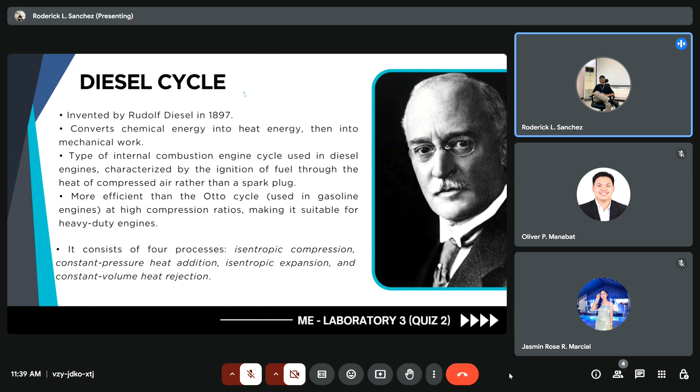However, sa diesel, medyo iba siya. Sa diesel kasi, wala tayong spark plug but rather enough na ang ating high pressure compression to combust a fuel mixture. So, ang diesel cycle daw ay more efficient than the Otto cycle at high compression ratios, making it suitable for heavy-duty engines. It consists of 4 processes: isentropic compression, constant pressure heat addition or isobaric, isentropic expansion, and constant volume heat rejection or isometric.

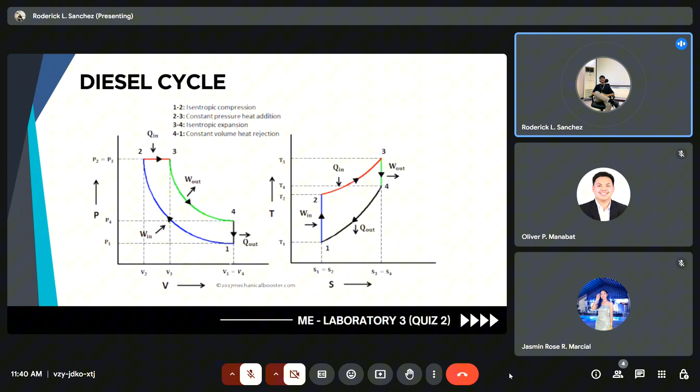So, in this slide, makikita natin ang PV at TS diagram ng ating diesel cycle. Pero, in order to better understand this topic, hihimay-himayin natin siya into some parts. A brief overview on the kinematics and mechanism of diesel engine.

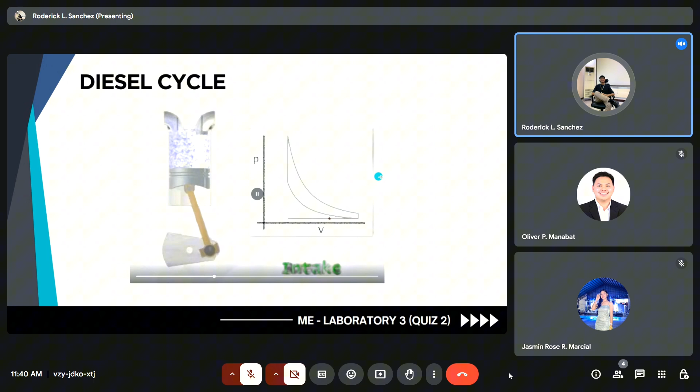As we can see here, meron tayong air intake, compress, power stroke, and the exhaust. So, ito ang magiging piston rod natin at ito ang ating cylinder sa diesel cycle.

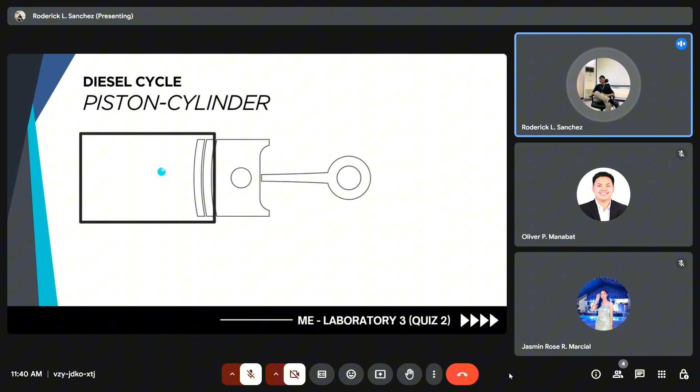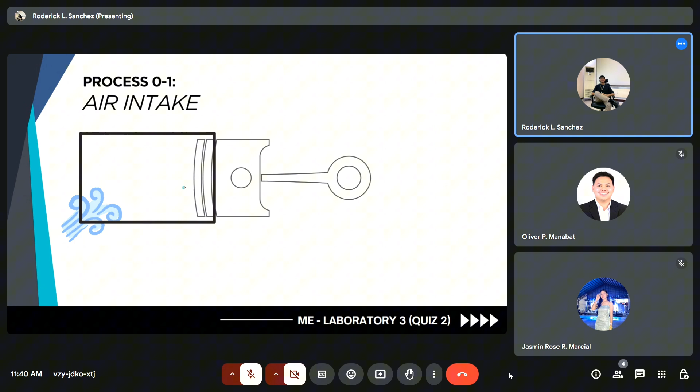Ngayon, process 0 to 1, syempre, hihigop muna tayo, ang ating engine ay hihigop muna ng air. As I said, kailangan ng air and fuel in order to have combustion.

So, after the air intake, magkakaroon na tayo ng isentropic compression. The piston moves from bottom dead center to top dead center. Ang bottom dead center natin is ang location ng ating piston ay nasa pinakababa papunta sa pinakataas. Only air is compressed in this stage, unlike the Otto cycle, where air-fuel mixture is compressed.

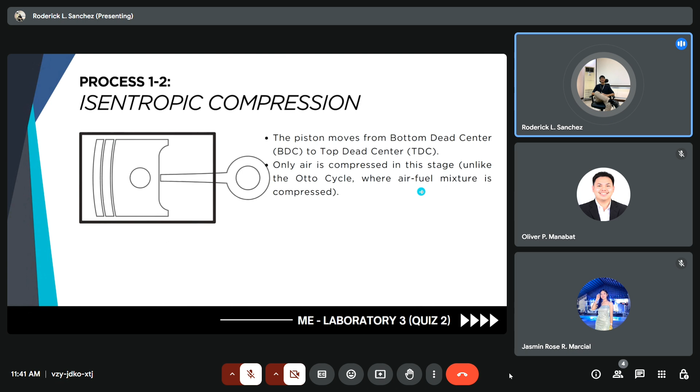Sabi nga compression, so obviously, ang volume natin magdi-decrease siya. As we all know to the PVT relationship, as volume decreases, pressure will increase. And eventually, temperature will increase, but the entropy remains constant.

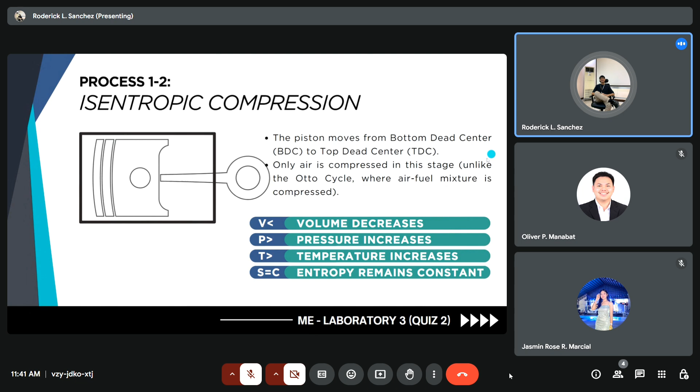Still, in the process 2 to 3, magkakaroon na tayo dito ng fuel injection. At TDC, fuel is injected into the hot compressed air inside the cylinder. Heat is added to the working fluid at constant pressure.

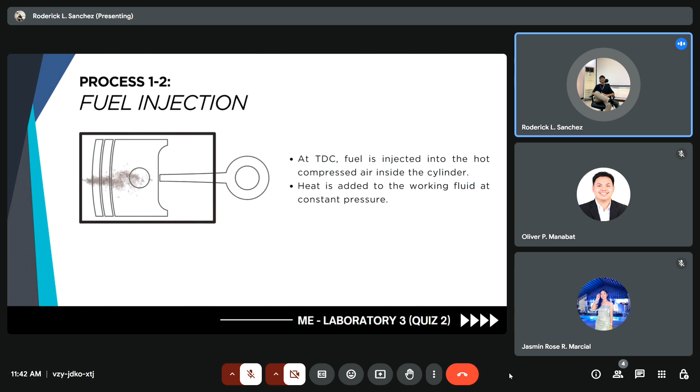Nabanggit kanina na sa Otto cycle, mixture na fuel and air ang nasa loob ng ating piston cylinder. However, dito kasi sa diesel cycle, hiwalay. So, intake muna ng air, tsaka magkakaroon tayo ng fuel injection. Kaya magkakaroon sila ng mixture at the top dead center na.

The next process will be the isobaric heat addition. In this stage, the fuel ignites spontaneously due to the high temperature. Combustion occurs and heat is added while the piston begins to be pushed down. This makes up the first part of the power stroke or expansion stroke.

So, dito nagkakaroon na tayo ng heat addition. Volume increases kasi due to the impact ng ating combustion as well as the motion ng ating machine. However, ang pressure dito natin ay constant. Temperature increase due to the combustion and entropy increases.

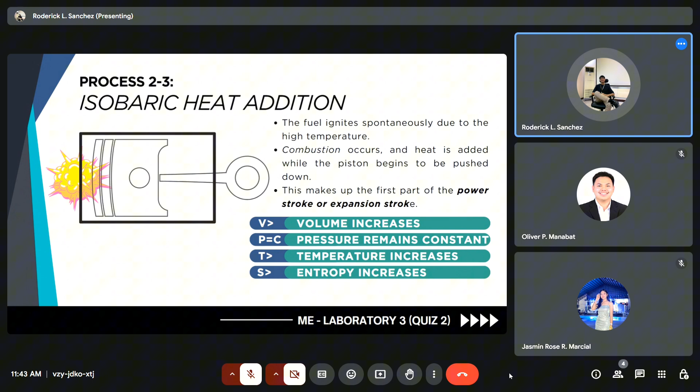Next would be the isentropic expansion. The combustion gases expand as the piston moves back to the bottom dead center. This is the main producing phase of the cycle where the gas works on the piston, converting thermal energy into mechanical work. So dito, as we can see to the animation, due to the combustion, magpupush down na ang ating piston rod. Therefore, expanding ang ating air volume.

In here, volume further increases. Siyempre, nawala na ang ating compression, kaya magkakaroon na tayo ng pressure drop. As pressure drops, temperature will also go down, whereas entropy remains constant.

The last process will be the isometric heat rejection. At the end of the expansion stroke, the exhaust valve opens. Heat is rejected as the combustion products are expelled. So, in this step naman, i-exhaust or i-reject na natin ang nasunog na fuel and air mixture. Ang ating volume would remain constant. Pressure decrease, temperature and entropy decrease as well.

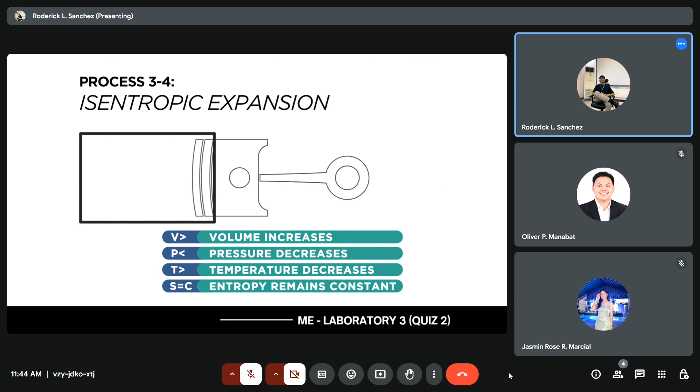So, from the word cycle, ibig sabihin, paulit-ulit lang siya. So, air intake, compression, heat addition, expansion, and lastly, the heat rejection. So, pagkatapos ng heat rejection, air intake ulit, compression, heat addition ulit, expansion ulit, then heat rejection ulit.

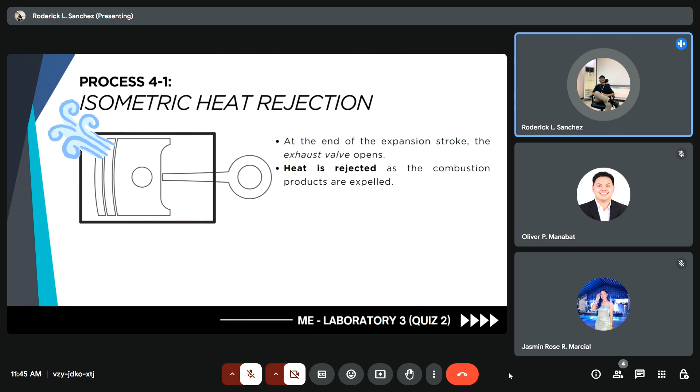So, this would be the PVT relationship of our isentropic compression. If we recall thermodynamics 1 and 2, alam natin na ang PV raised to K would be constant. So, without explaining this further, ito ang magiging PVT relationship natin.

So, the next would be isobaric heat addition. So, from the combined gas equation, kapag hinimay natin siya at linagay natin ang temperature to the left side and volume to the right side, malalaman natin na ang maximum temperature all over the minimum temperature is equal lang sa maximum volume all over the minimum volume.

Next would be the isentropic expansion. Similarly sa compression, nagkabaliktad lang ang ating subscript. So, depende yung subscript na yan sa ating maximum and minimum pressure as well to the other variables.

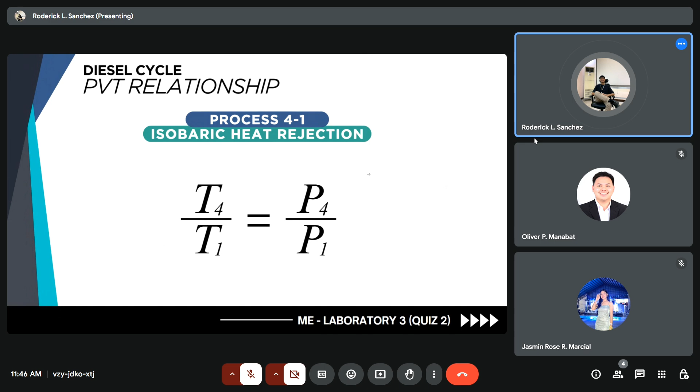Lastly, isobaric heat rejection. So, instead na pressure ang ating constant, volume naman in here ang ating constant. Kaya, ang T4 over T1 is equals lang sa P4 all over P1.

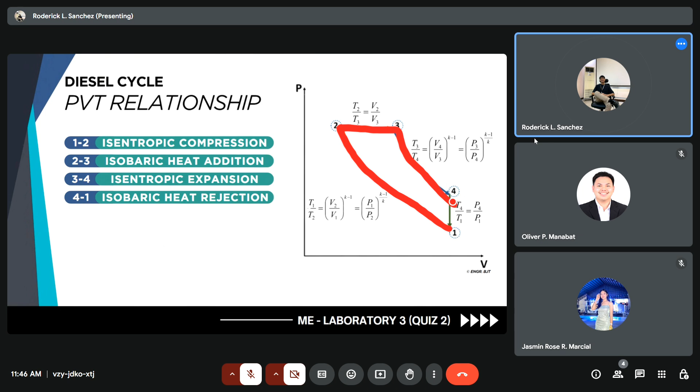So, this will be our whole PV diagram for the diesel cycle. Explain ko lang saglit na from the compression, bababa ang volume, tataas ang pressure, kaya ang stroke niya magiging ganyan. So, 2 to 3, isobaric heat addition, constant pressure, pero ang volume natin tataas. Then, expansion, further mag-expand ng ating volume, magkakaroon na tayo dito ng pressure drop. And lastly, the heat rejection, constant volume, magkakaroon pa tayo dito ulit ng pressure drop.

So, I know we are all familiar with the heat addition and heat rejection formula as well as the work. So, nagkaroon tayo ng heat addition from the 2 to 3 processes. Isobaric siya, so ang formula will be mass times the specific heat at constant pressure times delta T, which is ang temperature dito natin ay temperature 3 at temperature 2.

Heat rejection naman, nangyari siya sa 4-to-1 process at volume constant. So, mass times specific heat at constant volume times the delta T, T4 minus T1 ang ating QR. So, ang work will be the area lang under these points. Basically, pag minus mo lang ang ating QA minus QR, makukuha mo na natin ang work.

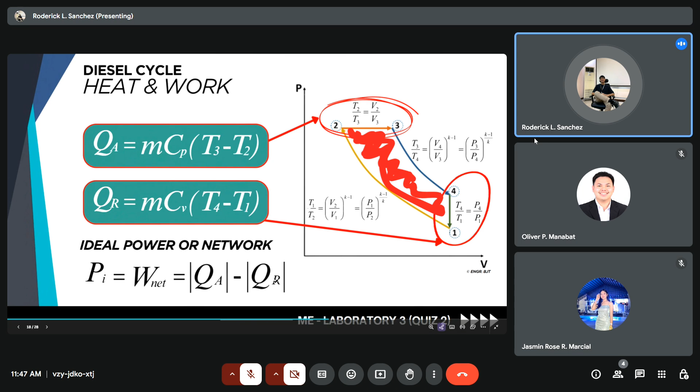Other formulas within the diesel cycle will be the clearance volume na equal lang siya sa volume at point at state 2. Volume displacement will be the volume 1 minus volume 2 lang, at ang percent clearance natin would be VC all over VD or 1 over RK minus 1.

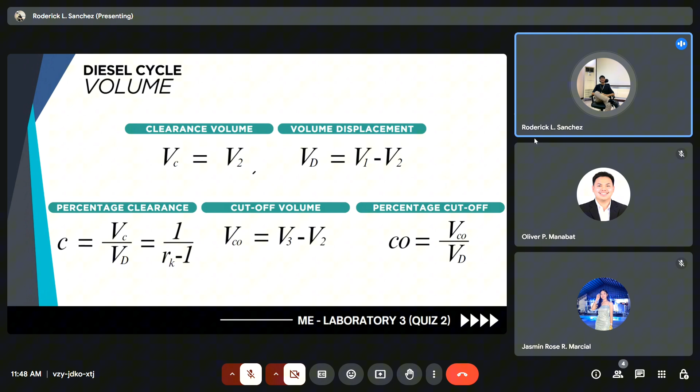So, meron din tayong cutoff volume and percentage cutoff. So, this will be the other formulas as well. We have the compression ratio and the cutoff ratio.

Sa Otto cycle, wala tayong cutoff ratio, pero meron lang tayong compression at expansion ratio. However, dahil sa diesel cycle, sabi nga sa first slide na mas mataas ang pressure ratio nito, kaya nagkakaroon tayo ng cutoff ratio.

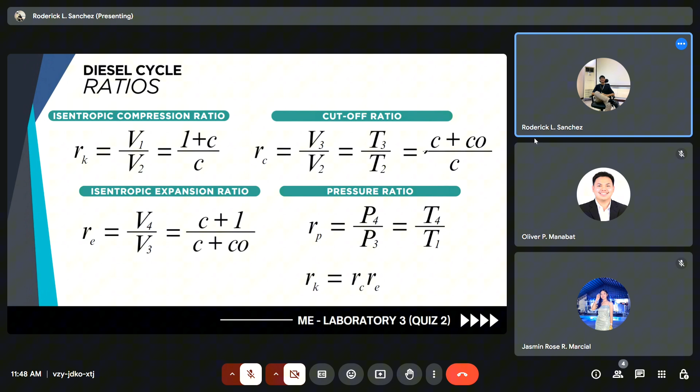Other formula would be mean effective pressure would be equal to work all over the volume displacement. At syempre, last but not the least, ang efficiency natin ay pwede natin makalculate via work all over QA, which will be ang work natin ang magiging work output, at ang ating work input naman will be the QA.

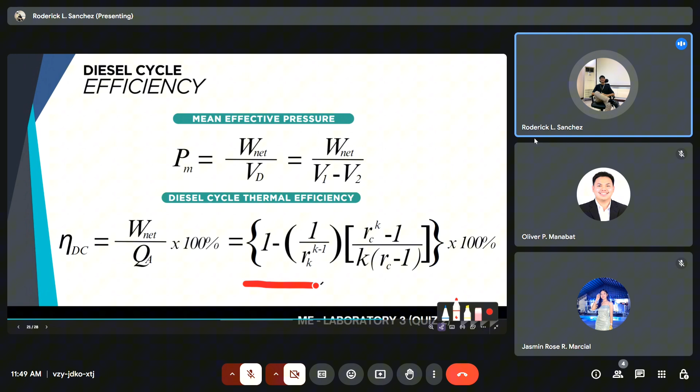Further derived formula would lead us to this equation. To better understand our diesel cycle topic, we would proceed to the solving problem edition.

So now we will be starting for our problem solving. For the first question, we have determine the efficiency of a diesel engine with clearance of 6% when the suction pressure is 100 kilopascals and the fuel is injected for 5% of the stroke. So the very first thing na gagawin natin is to list down the given values. So we have C, which is 6%, or the percentage clearance, which is equal to 6% or 0.06.

Next, we have a suction pressure of 100 kilopascals and a percentage cutoff of 5% or 0.05.

So, ang hinahanap para sa ating given problem is ang efficiency ng diesel engine. So, we have the following formula of work net over QA. However, dahil wala nga tayong given for the other parts of the cycle, gamitin natin yung isa pang formula, which is 1 minus open close parenthesis 1 over RK raised to K minus 1 with bracket RC raised to K.

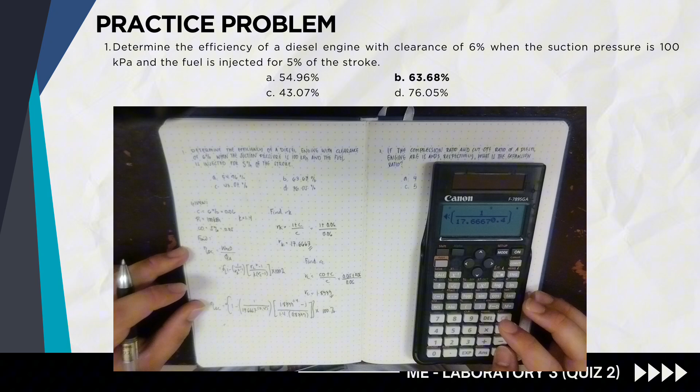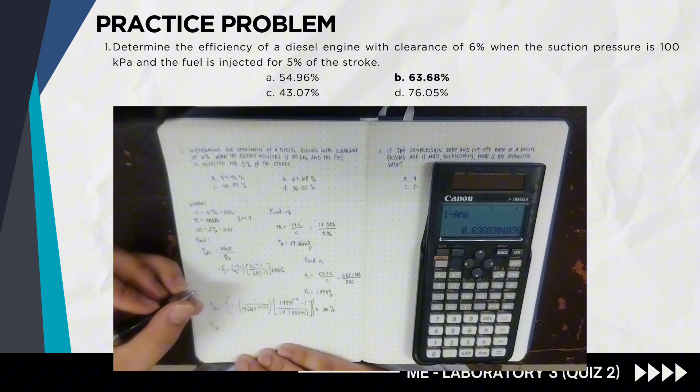So, kung input natin to sa calculator, divide natin sa 1.4 times 0.8333. And then 1 minus the given answer, ang lumalabas po ay 0.6368.

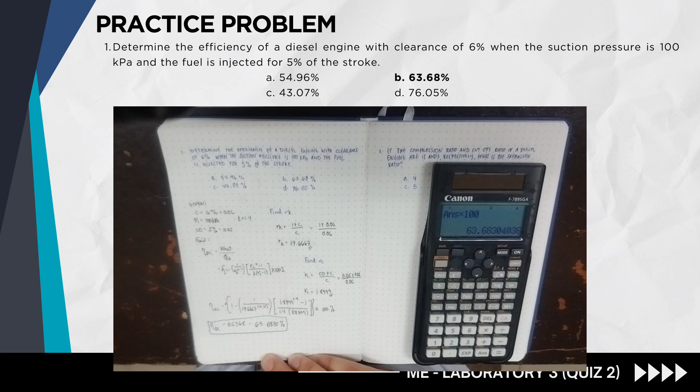Now, if multiply natin siya ng 100%, so we have 63.6830. So, this is the final answer for our problem number 1, kung saan ang sagot ay letter B.

Now, for our second problem, we have if the compression ratio and cutoff ratio of a diesel engine are 15 and 3 respectively, what is the expansion ratio? So, first, let us list down the given. So we have the isentropic compression ratio of 15, ayun po yung RK, and then we have the cutoff ratio, which is RC, which is equal to 3.

So ang hinahanap ng ating given problem ay ang isentropic expansion ratio, which is RE. Meron tayong given formula for RE, which is V sub 4 over V sub 3. However, wala tayong any given pagdating sa cycle.

So, i-check muna natin yung other given formulas, which is C plus 1 over C plus CO. So, may correlation sa percentage clearance and percentage cutoff. However, wala pa rin tayong values for that. So, hanap tayo ng ibang formulas. Check natin ang isentropic compression ratio formula.

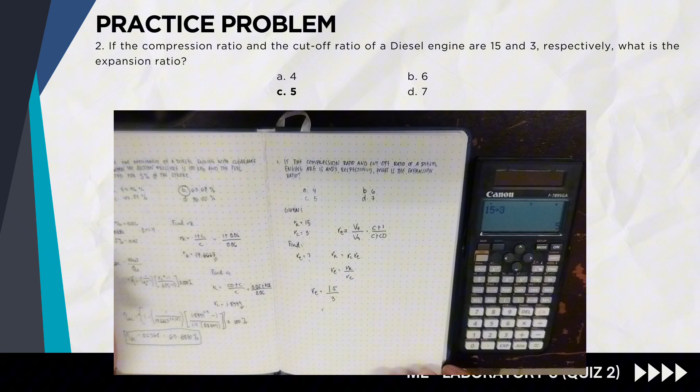is equal to 15 over 3. And, of course, 5 ang lalabas, pero try natin i-calculate pa rin. So, 5. Para po sa peace of mind ng lahat. So, 5 po ang value ng RE natin. Kung saan ang ating final answer ay letter C.

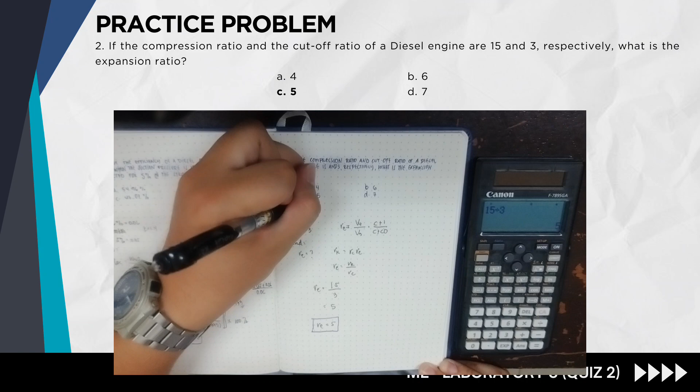Number 3. An air standard diesel engine has a compression ratio of 20, cutoff ratio of 5, intake air pressure P1 is equals to 100 kPa, T1 intake air temperature equals sa 27 degrees Celsius. Ang unknown is work in kilojoule per kilogram.

Ang T1 natin, convert na natin into Kelvin, kaya magiging 300K. First thing na isosolve natin is yung T2 by using the formula RK is equals to T2 over T1 raised to 1 over K minus 1. Substitute lang yung mga given sa formula.

20 is equals to T2 yung unknown. T1 is 300K raised to 1. Standard ng K is 1.4 minus 1. 1.4. Yan. Shift solve. T2 na makukuha natin sa calculator is 994.34K.

Next thing na isolve is yung T3 by using the formula RC is equals to T3 over T2. Derive lang T3, T2 times RC. Substitute yung mga formula. T2 is 994.34K multiplied by 5, which is yung RC. Ang T3 na makukuha natin sa calcu is 4,971.68K. Since may value na tayo ng T3 at T2, pwede na tayo mag-proceed sa QA.

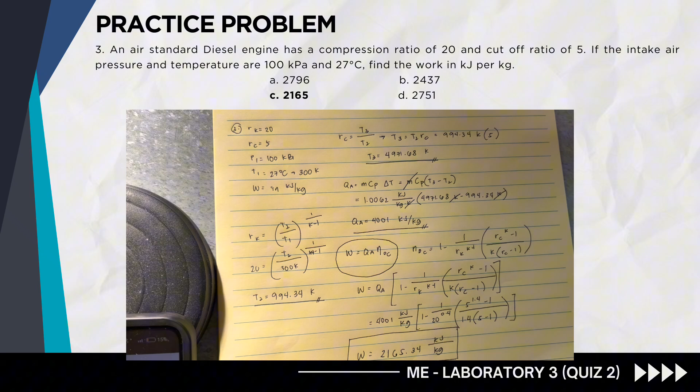Number 4. An engine operates in an air standard diesel cycle with the following conditions. The pressure and temperature at the beginning of compression are 100 kPa and 300 K, that is T1 and P1. T1 is 300 K, P1 is 100 kPa, and then respectively at the end of heat addition the pressure is 6,400 kPa and the temperature is 2,100 K. That is P2, 6,400 kPa, and T3, 2,100 K. Determine the work produced in the cycle. So ang hinahanap ay work.

First thing ay gamitin ang formula ng PVT relationship, ulit na shortcut natin. Wala tayong T2, so kukunin natin ang T2 gamit ang temperature and pressure. T2 is T1 times P2 over P1 raised to K minus 1 over K. Substitute lang yung mga given: T1 is 300K, P2 over P1 is 6,400 over 100, raised to K minus 1, 1.4 minus 1 over 1.4. Ang T2 na makukuha natin ay 984.4 K.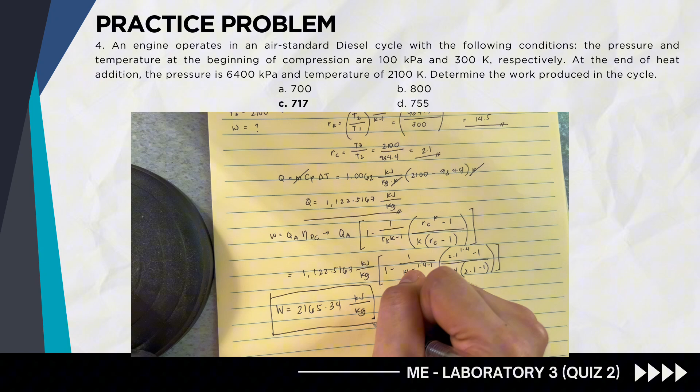The thermal efficiency formula is equals to, NDC is equals to 1 minus 1 all over RK raised to K minus 1, times RC raised to K minus 1, all over K times RC minus 1. Then we multiply it by 100.

So in this formula, we don't have the value of RC. To get the value of RC, we use RC equals T3 over T2. But we don't have T2 yet. So to get T2, we use RK equals T2 over T1, raised to 1 over K minus 1.

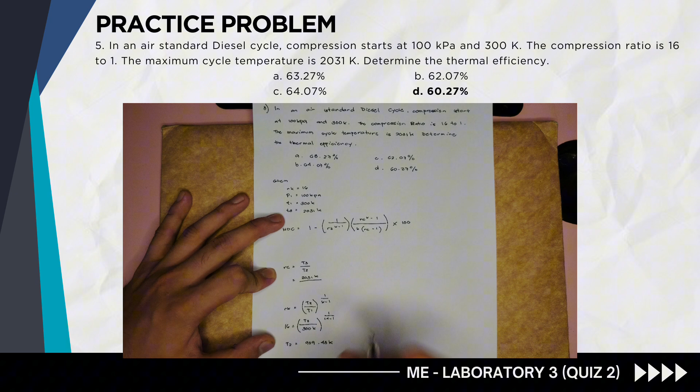Now we can get RC. We substitute the given value of T3, which is 2031 Kelvin, over T2, which is 909.43 Kelvin. So our RC is equal to 2.2. Now we have RC.

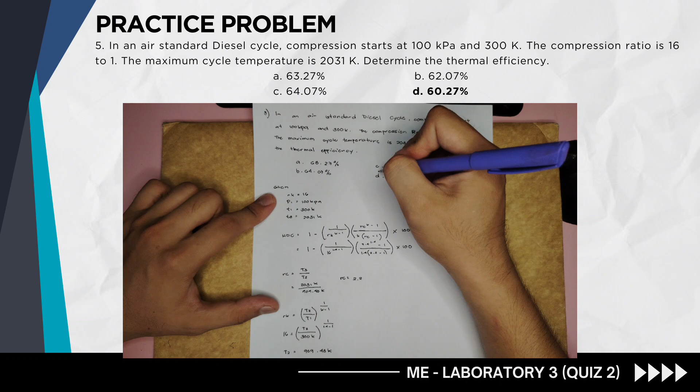RK is equals to 16, raised to 1.4 minus 1. RC is equals to 2.2, then 1.4 minus 1, over 1.4, with the given RC of 2.2 minus 1, times 100. So our NDC now, NDC is equals to 60.27%. So here, the answer is 60.27%, letter D.

For number 6, there is heat supplied which is 317 kilojoules per cycle to an ideal diesel engine operating on P1 equals 97.91 kPa, T1 equals 48.9 degrees Celsius at the end of compression. The pressure is 3930 kPa. Determine the work produced in the cycle.

The first thing we need to do is write down the given values: QA equals 317 kilojoules, P1 equals 97.91 kPa, T1 equals 48.9 degrees Celsius, P2 equals 3930 kPa. What we are looking for here is the work produced in the cycle.

The formula for work is W equals NDC times heat added. So what we're missing is NDC. The formula for NDC is 1 minus 1 over RK raised to K minus 1, times RC raised to K minus 1, over K times RC minus 1, times 100. What we're missing here are two things.

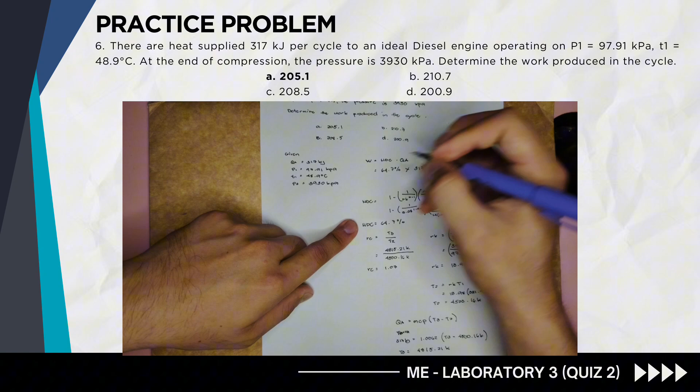Now that we have NDC and QA, we can get the work produced in the cycle. Our NDC is 64.7% times the value of QA, which is 317 kilojoules. Our work produced in the cycle is equals to 205.1 kilojoules. The answer we got is letter A.